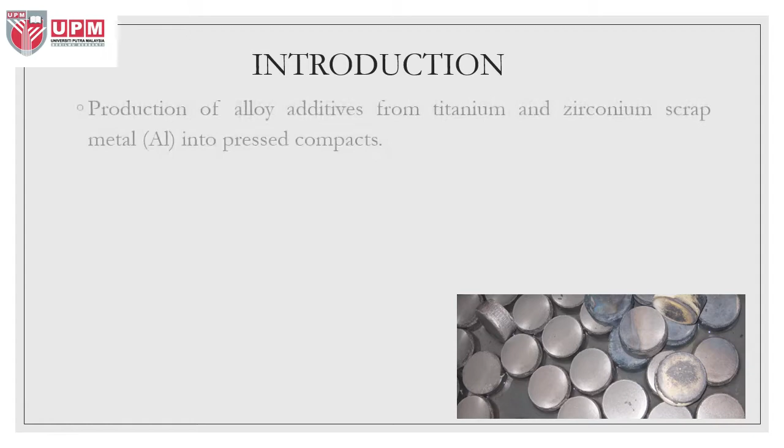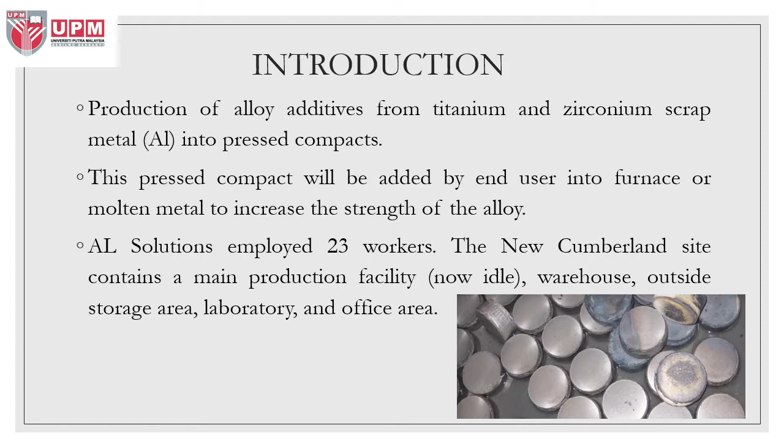AL Solutions is a company that processes titanium and zirconium scrap metal into press compacts that aluminum producers use as alloy additives. AL Solutions also obtains scrap from zirconium and titanium manufacturers, and end users add the press compact to the furnace or molten metal to increase the strength of the aluminum alloy.

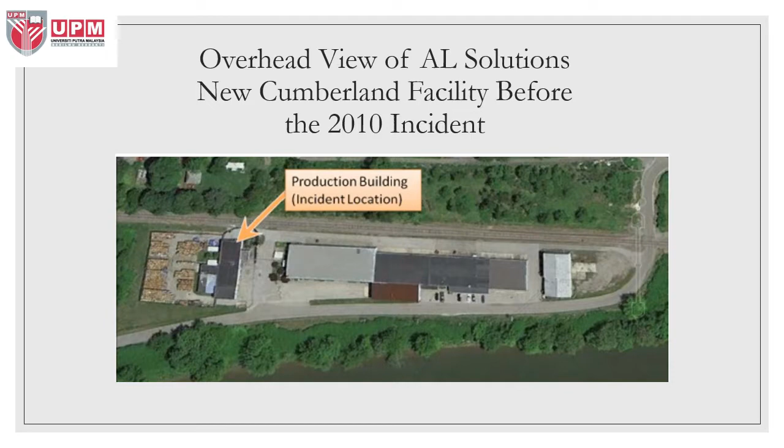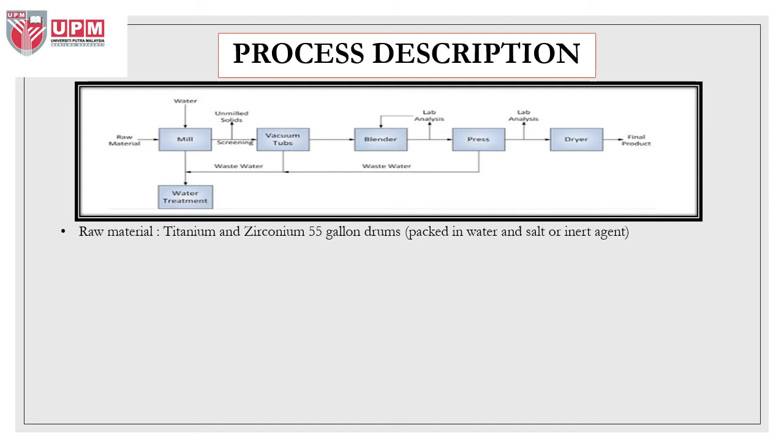AL Solutions received the raw materials titanium and zirconium from the supplier. The metal typically arrived packed in water, but it was also packed with salts or an inert agent such as argon gas to reduce the risk of explosion during transit.

During milling, a blade reduced the metal particle size and removed the oxide surface layer of the raw material.

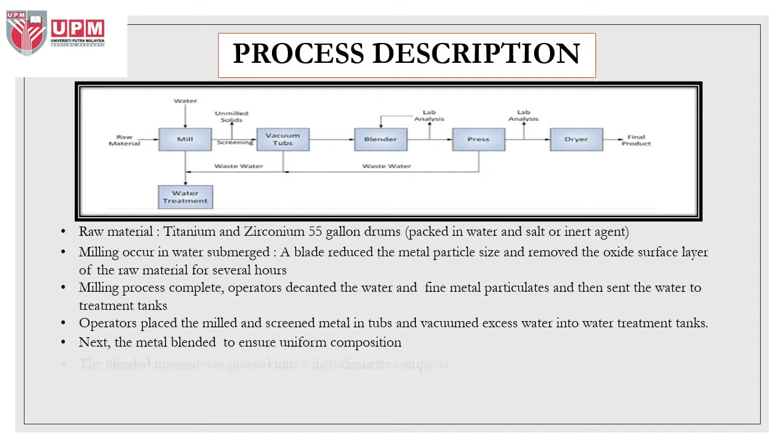When milling was complete, the operator decanted the water and fine metal particles, known as fines, and sent the water to the treatment tank. The milled metal was transferred from the milling tank and screened to remove any large solids. These solids were either returned to the mill for further size reduction or discarded.

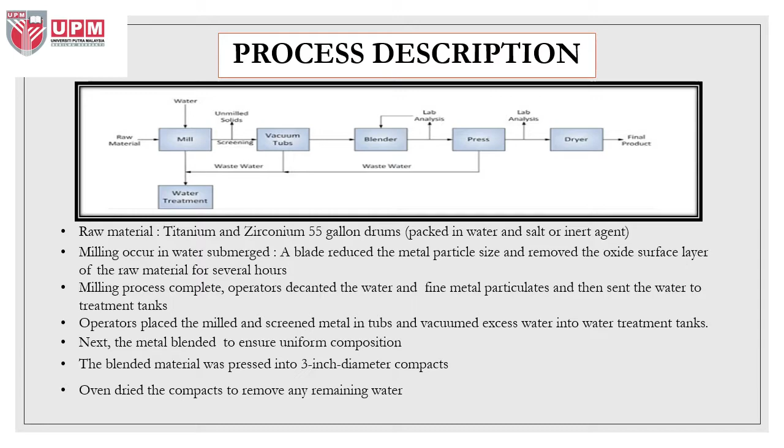The operator placed the milled and screened metal in tubs and then vacuumed excess water into the water treatment tank. Next, the operator blended the metals to ensure uniform composition in the lots. The blended material was pressed into 3-inch diameter compacts, and then later the compact was oven dried to remove any remaining water.

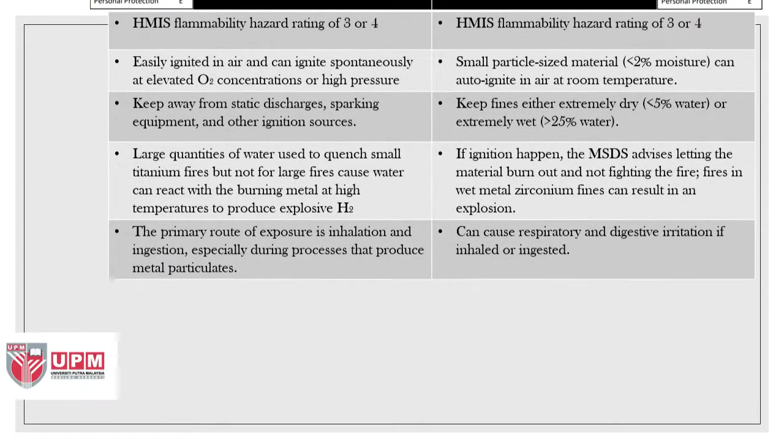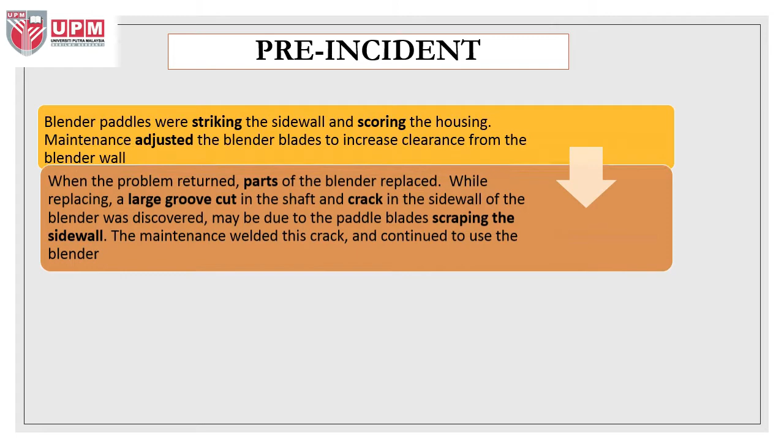Before the incident happened, there were a few consequences that occurred previous to the incident. First, the blender paddle was striking the sidewall and scoring the housing. Maintenance adjusted the blender blade just to increase the clearance from the blender walls. Later on, when the problem returned, the parts of the blender were replaced.

While replacing the parts, a large groove cut in the shaft and a crack in the sidewall of the blender was discovered, likely due to the paddle blade scraping the sidewall. The maintenance team welded this crack and continued to use the same blender. Later, on the morning of the incident, an operator requested maintenance replace a worn paddle in the blender. A maintenance employee retrieved a paddle from an old blender instead of installing a new unit.

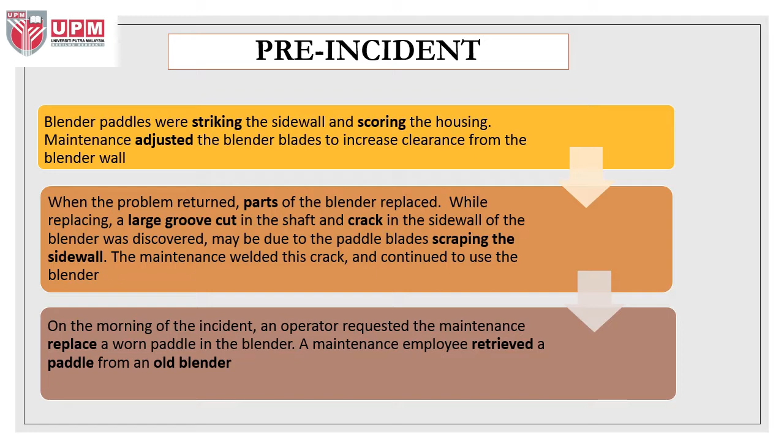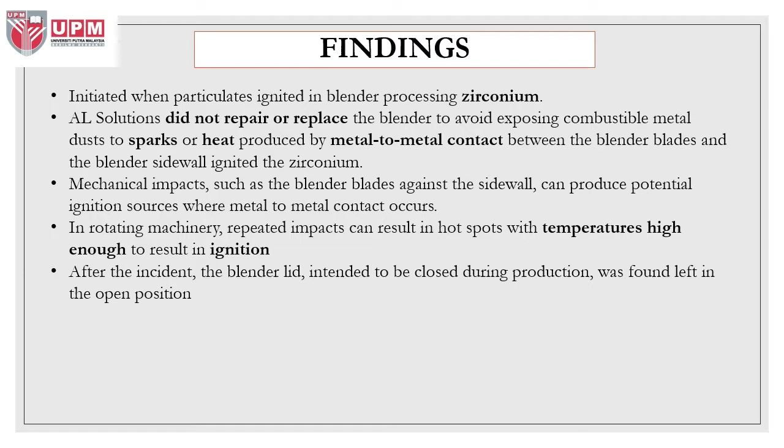Now I will present the findings. From the incident report, it shows that ignition was initiated from zirconium ignition occurring in the blender. This is due to a blender blade that had been defective and was not replaced by maintenance. This blade hit against the sidewall of the blender and produced ignition due to metal contact. This repeated impact resulted in hot spots where the temperature was high enough to result in ignition.

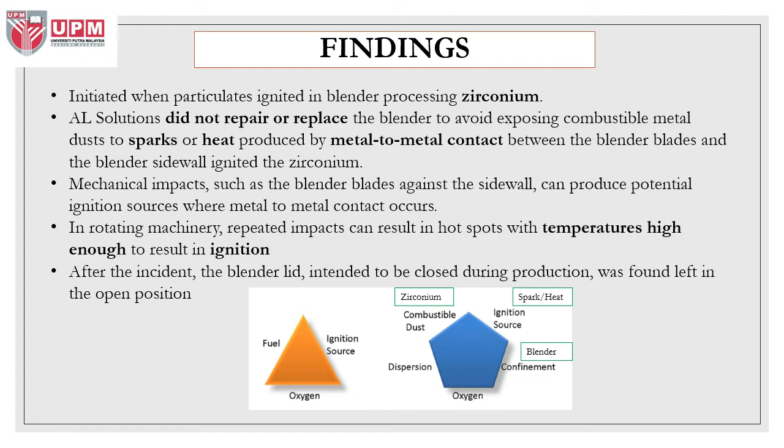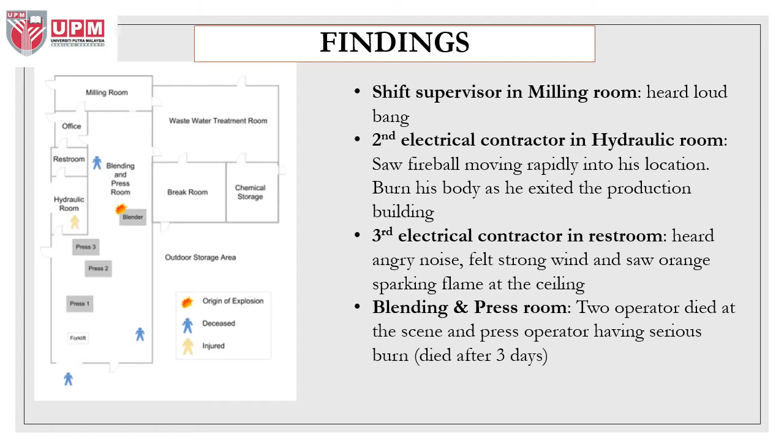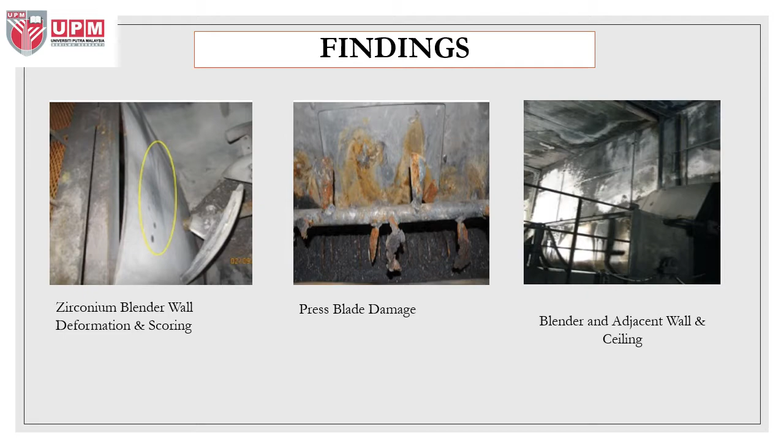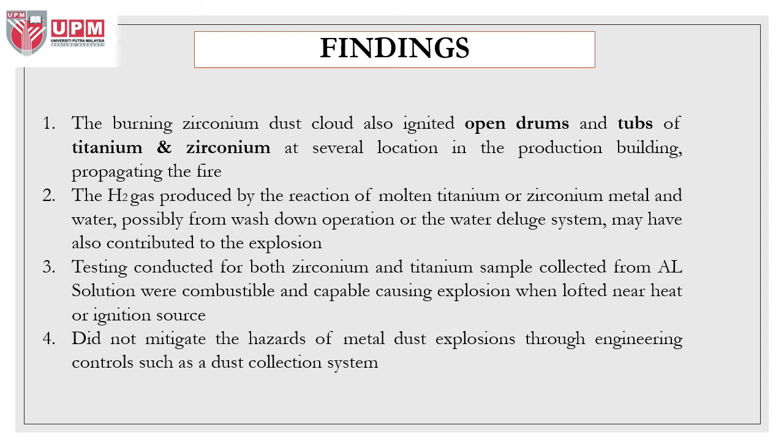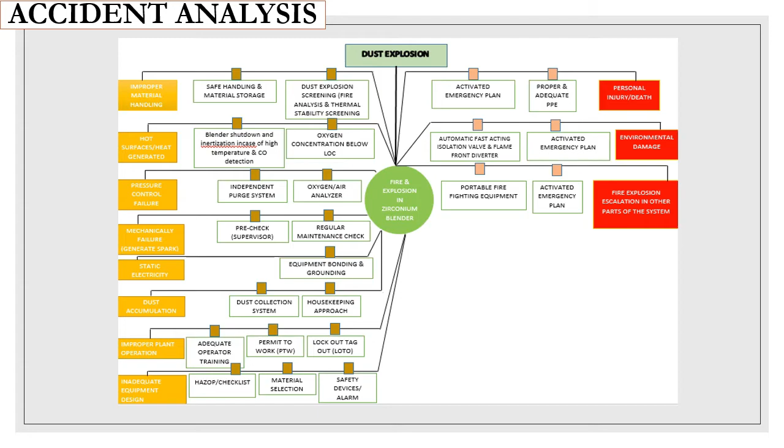Let's proceed with the recommendations. First, they need to develop training material for all employees and contractors. They also need to ensure periodic refresher training for existing employees and contractors. Second, they need to conduct a process hazard analysis as defined in NFPA.

Third, prohibit the use of water sprinkler systems and water deluge systems in all areas of the building. And for the last recommendation, for all new and existing equipment and operations at AL Solutions facilities that process combustible metal dust or powder, they should apply NFPA standards for combustible metal.

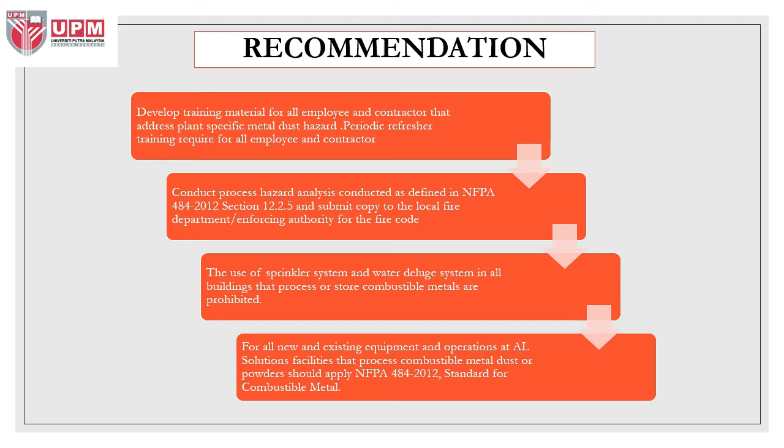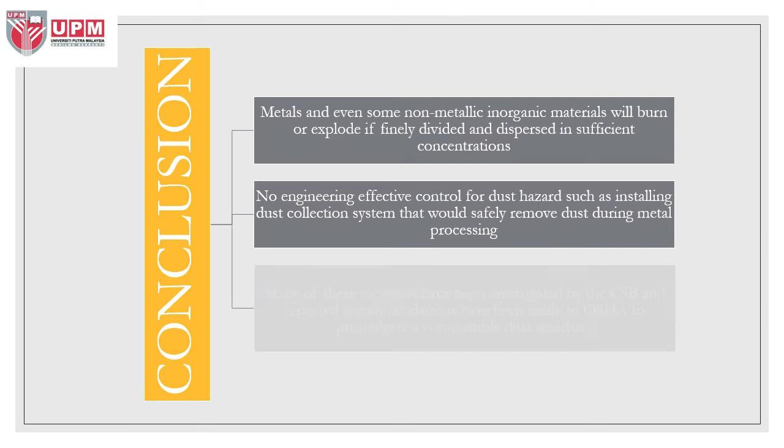For the last part is the conclusion. We need to know that metals and even some non-metallic inorganic materials will burn or explode if finely divided and dispersed in sufficient concentration.

Second, at AL Solutions, there was no effective engineering control for dust hazards, such as installing a dust collection system that would safely remove dust during metal processing. Third, many of these types of incidents have been investigated by the CSB, and repeated recommendations have been made to OSHA to promulgate a combustible dust standard.